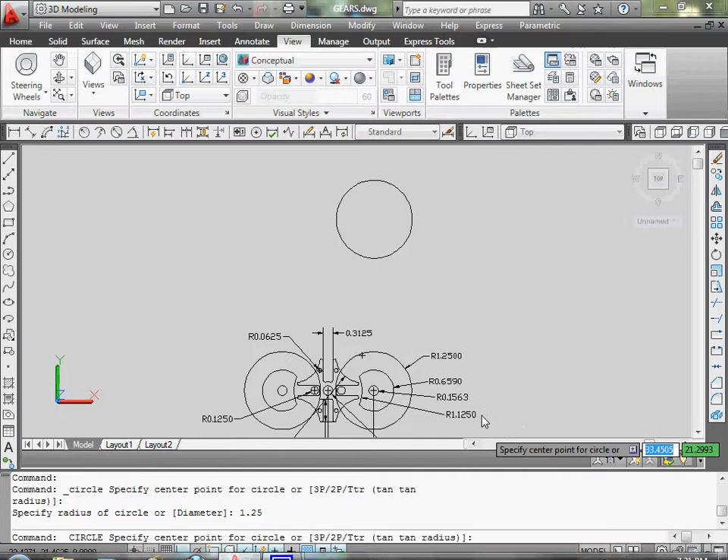So circle, my radius over here is 1.25. Then the inner circle is radius - I'm only going to do one of these circles because I can just mirror it, both are the same. So the second one is going to be 0.659. I don't know if these numbers are weird, don't worry about it, it's weird for some reason. Alright, enter 0.1563.

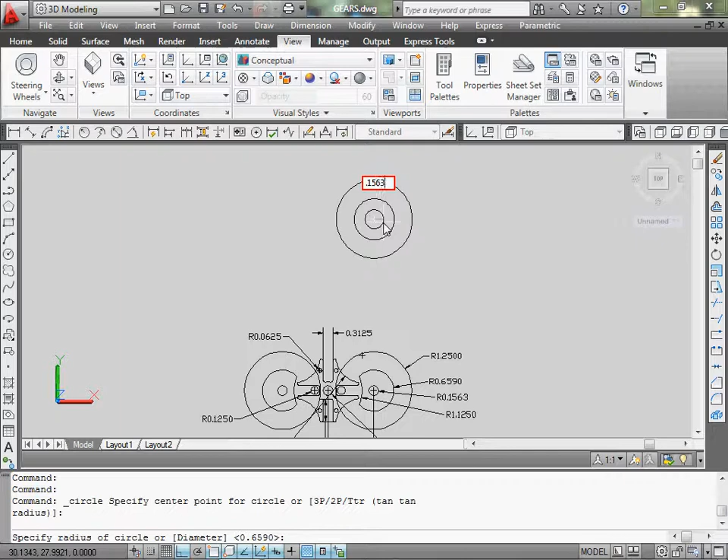Alright, so that's my first. Now I got dimensions to the center over here. So I'll draw myself a line, center line pretty much, and 1.5. Draw that circle over here, which is 0.1563. It's actually the same as this one, so I could just copy it. I'm too lazy to type it.

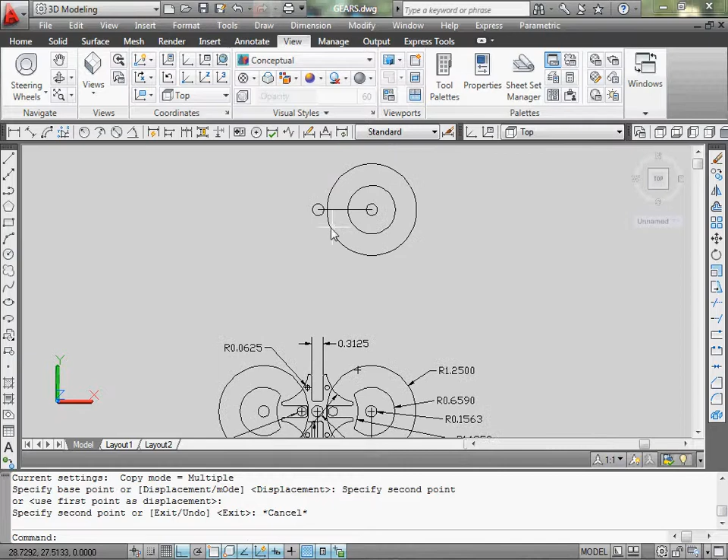And now I need to cut this from this circle here. We have a radius for that, and we know that that's the center of it. So the radius is 1.125. Do a circle, R enter 1.125. And I can use the trim command.

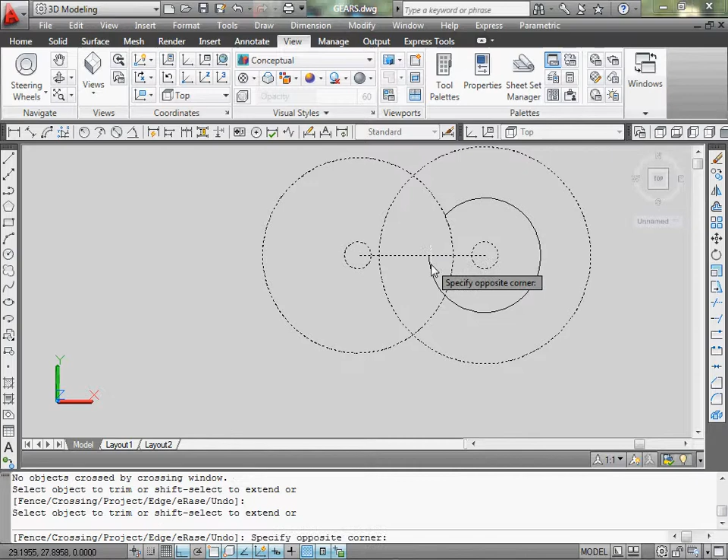Just trim this off of here, and of course I got to trim off this part too. And this I can just delete, and a center line I can delete it because I don't need it anymore. So I actually have both sides complete because I can mirror that if I wanted to. Do it for a visual right now.

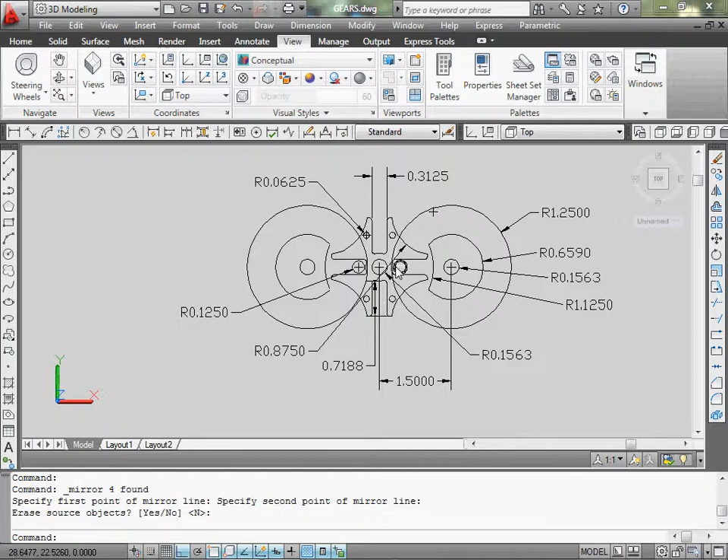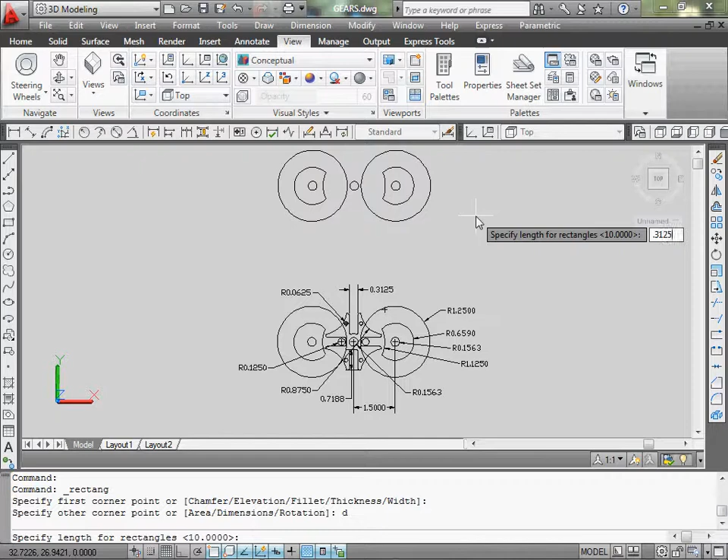And this next setup is I have to draw this whole cross-shaped item. To do that, I'll first need to get all the specs. So I can draw these rectangles because I have dimensions for that, so I'm just going to do that first. So the rectangle, D for dimensions, it's wide by 0.3125 and it's high by 0.7188.

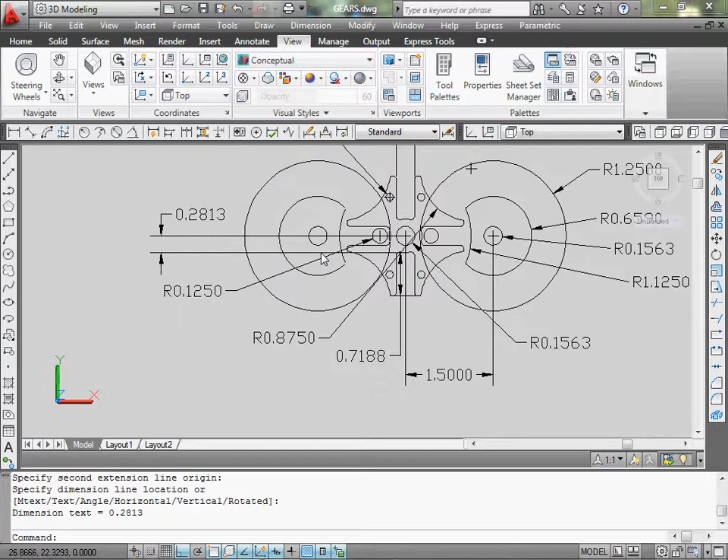Looks like I am missing a dimension. I should have a dimension from the inner circle here. There we go. So again, missing a dimension for you guys, if anybody's interested. And so it's 0.2813 from the center of the circle, or the whole item pretty much, to the edge over here. So I have a square.

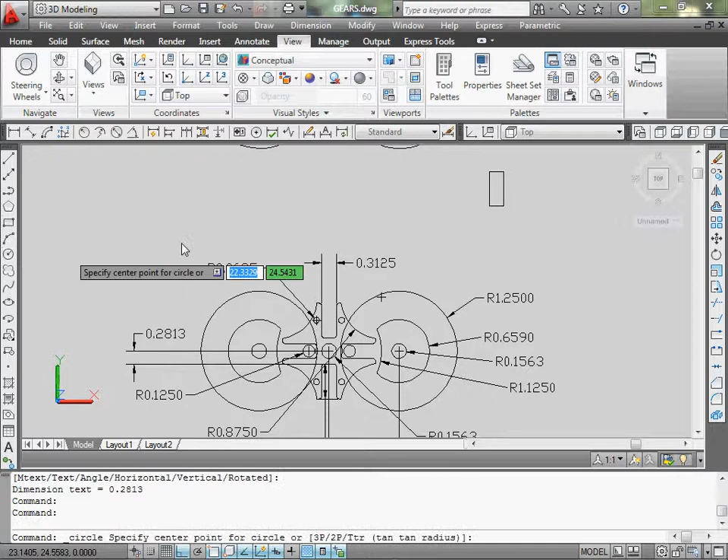So actually, technically that's the square size. If you double that, you would get actually the square. But I'm just going to do a circle, or I'm going to copy this circle we drew on over here on top. And I'm going to move it over the distance 0.2813.

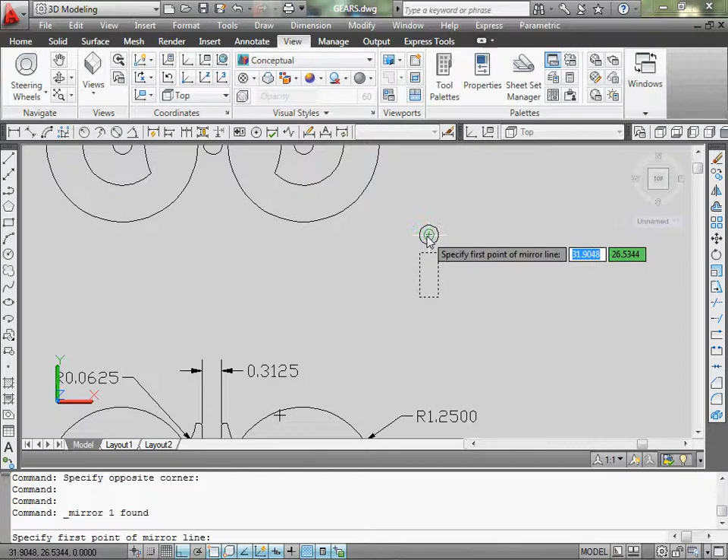So I actually have this material here in between. I can mirror this, then I can go select one of these, go to copy, rotate, pick a point, and I'm actually, before I click anything, I'm going to type in C for copy. That way I don't lose this piece. Just copy it, and I'm going to mirror it again.

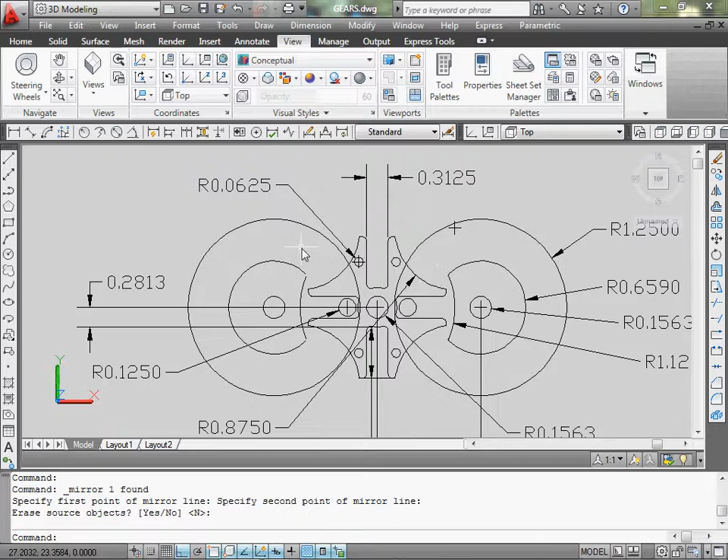Have that done, that's the radius for that little one. Let's see the outer. Jeez, I don't have the outer radius. Guess I don't. Wow, I did screw this one up. Unless I can't see it, but I think I'm missing - oh yeah, no, it's right here.

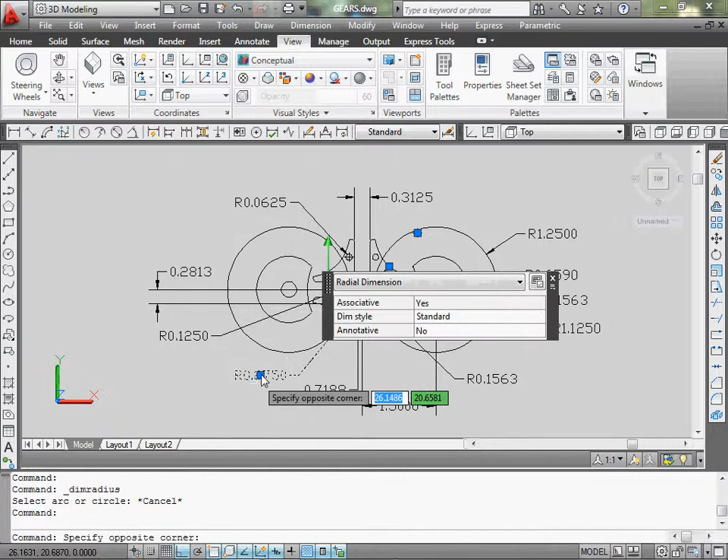I should have moved it better. Oh, that's what I'm doing. Let's see if I can read dimension. There we go, that looks a little bit better. So I do have the radius for this. The only problem is I don't know how to space it, but that's okay.

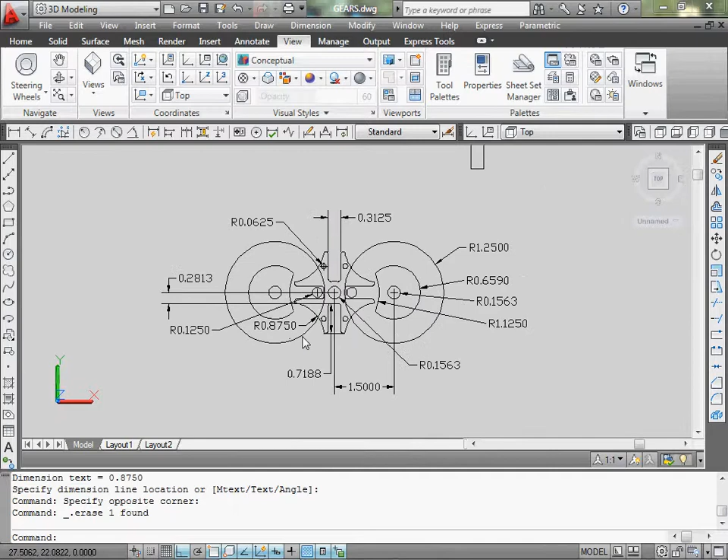I'm just going to do a circle first. R enter 0.875. That is the size of this fillet, which is a fillet. So actually, first - let's see, hold on one second.

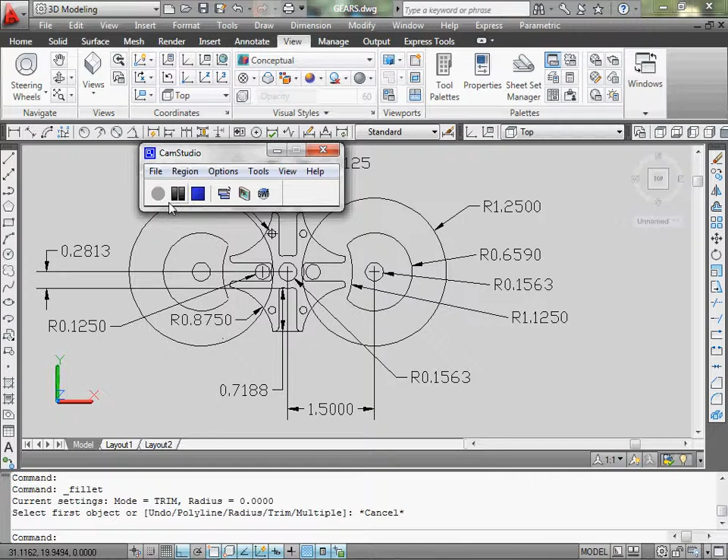So I should have just gave you guys dimension. Center of, that's the center mark of this arc right here. It's 1.125 and 1.125 away. So keep that in mind. I might have to print this out again so it'll be easier for you guys.

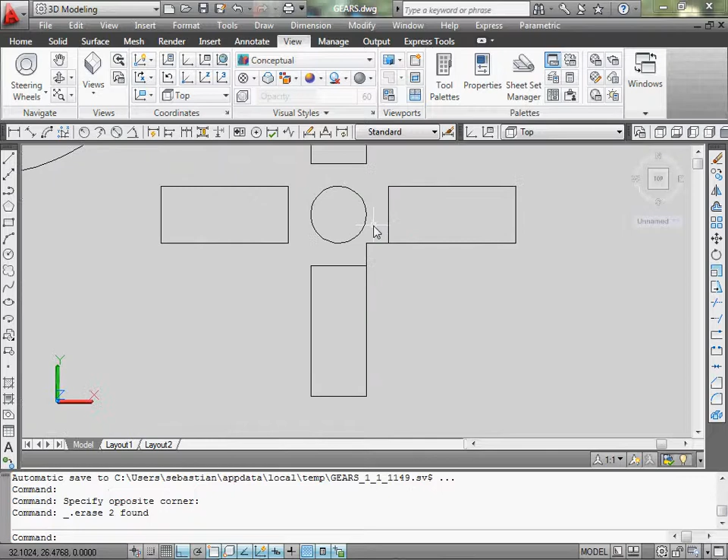So I will draw that circle, it is radius 0.875, and I can move it from the center to center of the circle here, the object. I'll move it to the right by 1.125 and move it up 1.1.

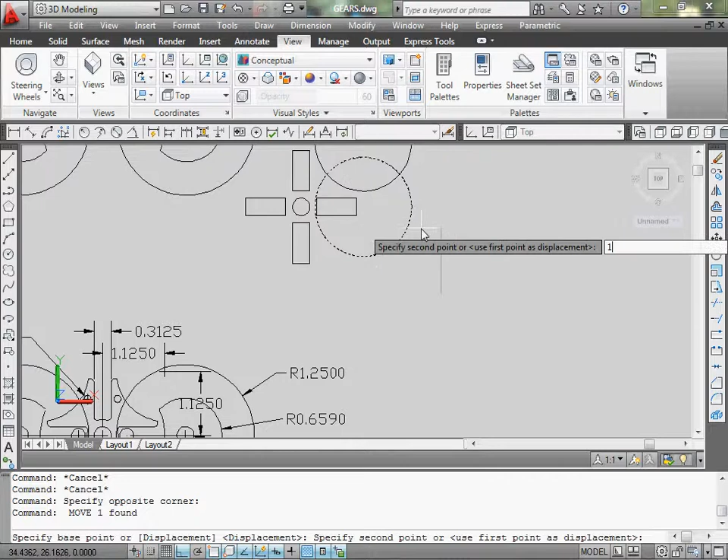Please move it up 1.125. There we go, that's the arc. Now I need to get this box here. To do that, I'm just going to draw it out using a rectangle.

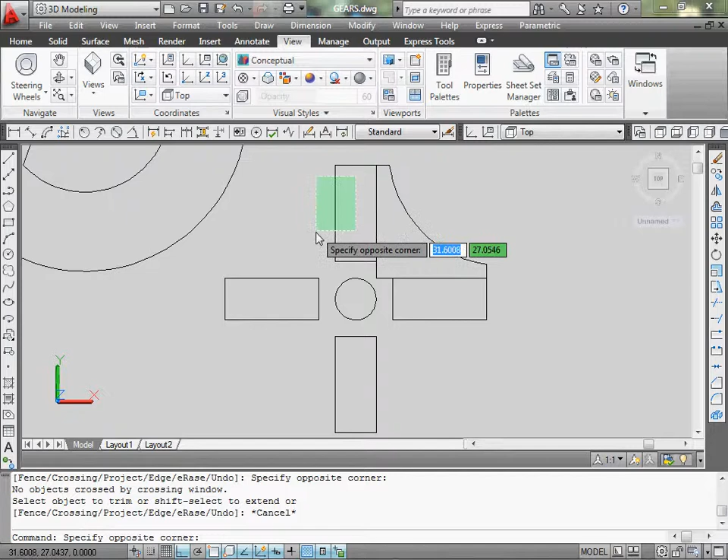Rectangle right here, make a box like that. I'm just going to trim off the parts I don't need. Size something like that. These are actually not needed anymore. Well, actually, I could leave them, but I'm just gonna delete it. Or I'll leave them because I need this line right here. So I should actually explode it.

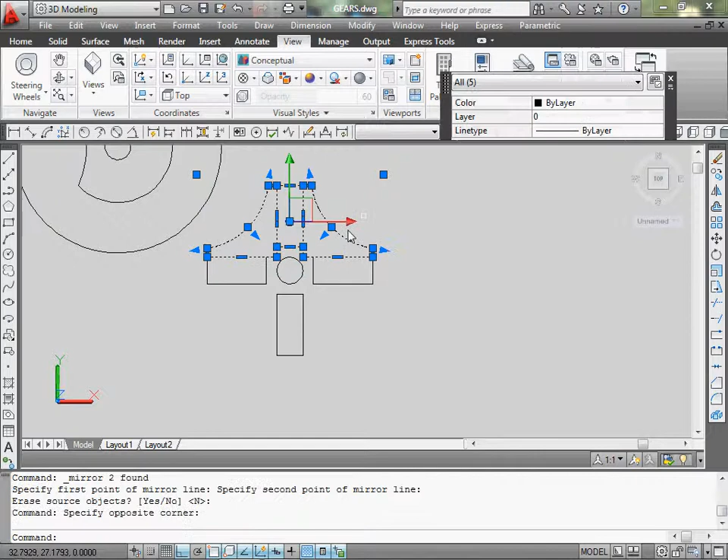But I'm just gonna mirror this around first. Mirror that, and of course, mirror it once more, going downward. Once I have that accomplished, all I need to do is explode these rectangles in here. Remove the points. Give this a fillet.

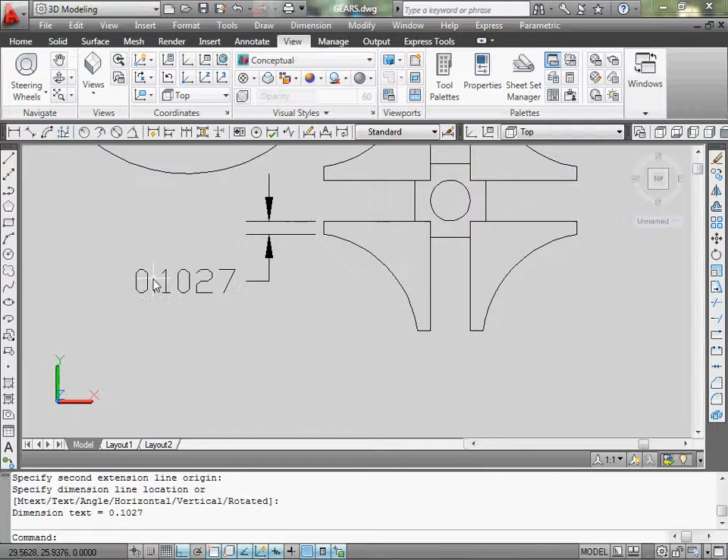I can dimension this. I'm not going to give you guys a specified fillet size. 0.1, I'm just going to do a little bit smaller than that, so it looks like this. So I will do 0.05. See, I was going to tell you guys to figure that out on your own, but I just told you.

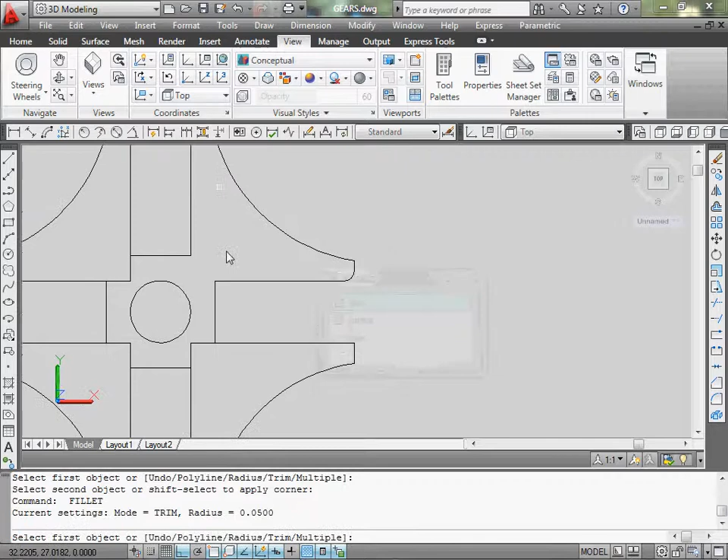But again, make sure you do all of them. Got a glitch on that side. Jeez, what the hell's going on? Gotta explode this before I go any further because it's causing problems. So I'm gonna select this again. Explode it all, each one is separate now.

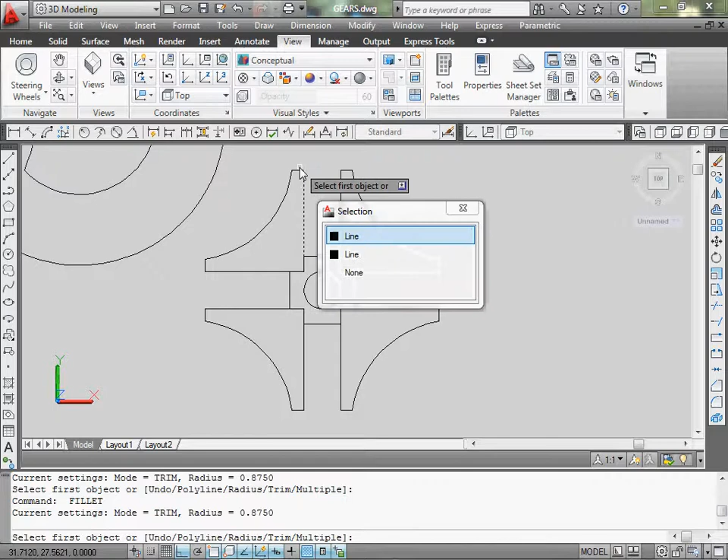Got a fillet, I got the radius set. Radius, no it's not set. The old one, 0.05, I do one. Should I select one? Line, of course. And should be able to. No, alright, you have to do each one.

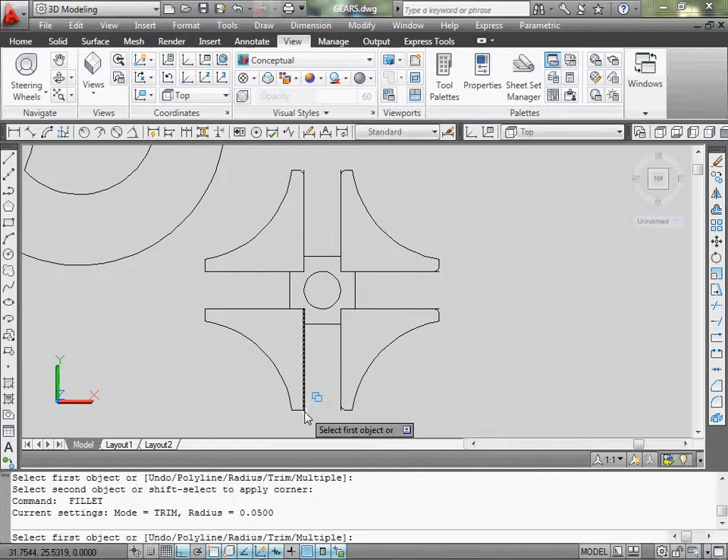What was the radius of the large circle? That makes sense for me. It's 0.875, it should be on there. It's just hard to find it because I put it to the other side.

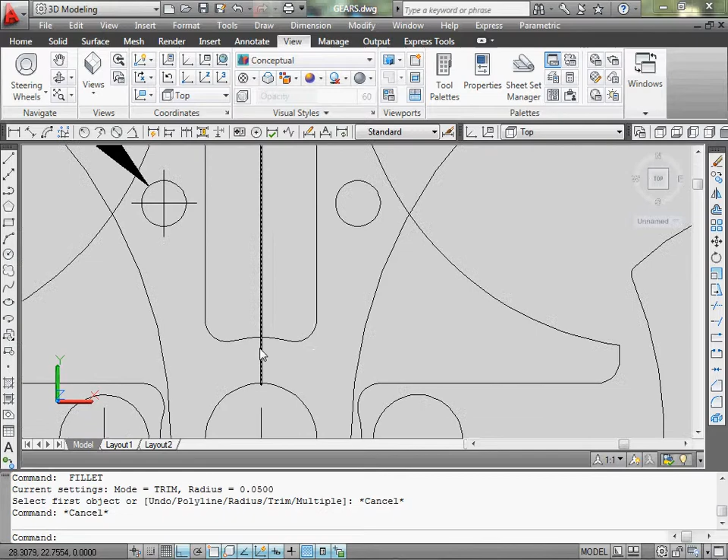Once you have all the corners filleted like that, you still need to fillet the inside, like so. These are filleted, so I'll do that too. It's asking me this two-line system because I actually double-lined this whole system for some reason.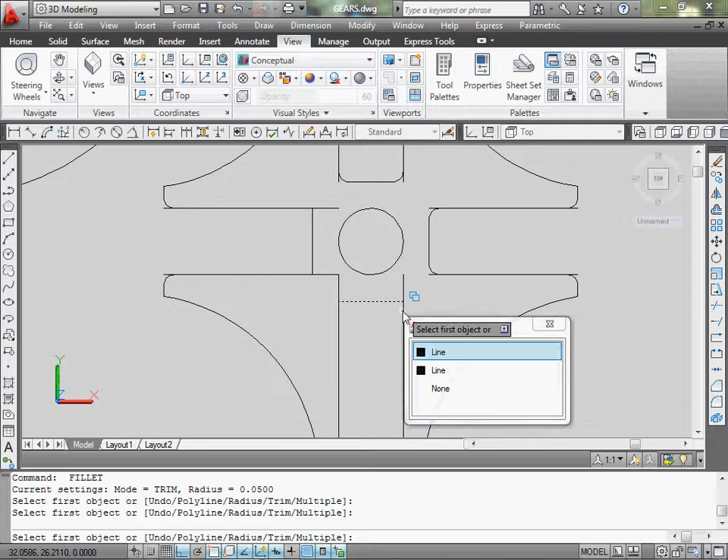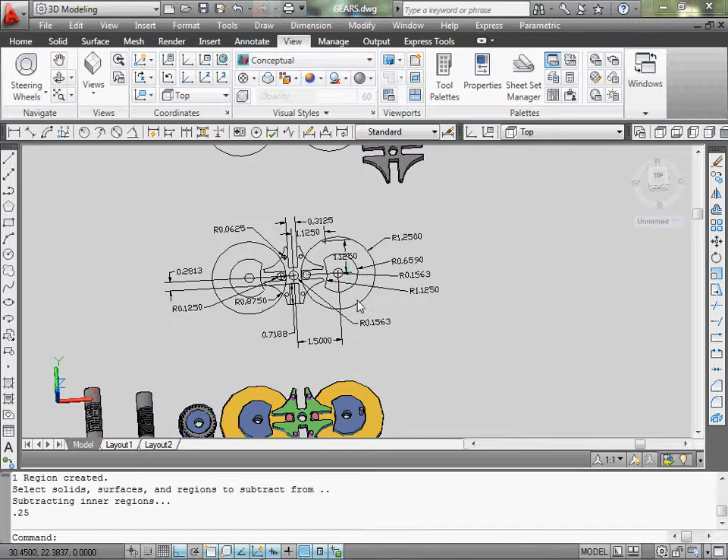There we go. And to make it short and sweet, I can just press pull this part. Specify distance, I think it's a quarter. You guys can do it. I'm missing some measurements that I have to look at.

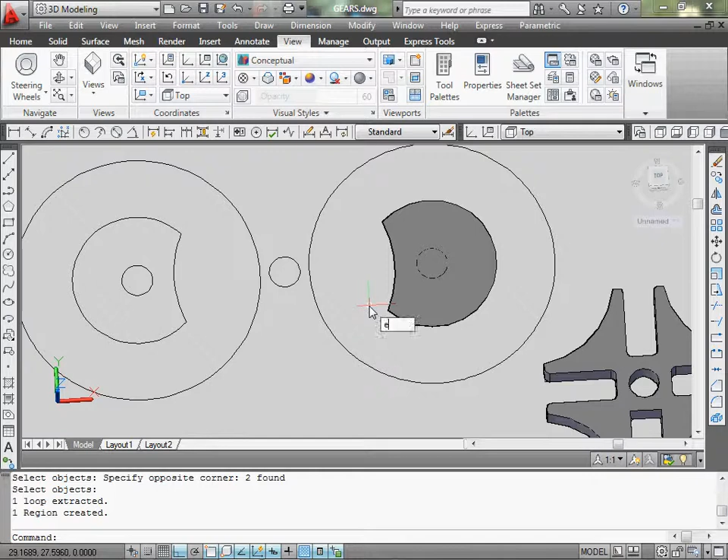Sure. Anyways, so I did press pull that. I can extrude these so that each one's separate. Or first I gotta make them regions. There we go, it's a solid piece now. Extrude it, I'll extrude a quarter. Extrude the insides to 2.5. And I'm gonna do this one going downwards, a quarter.

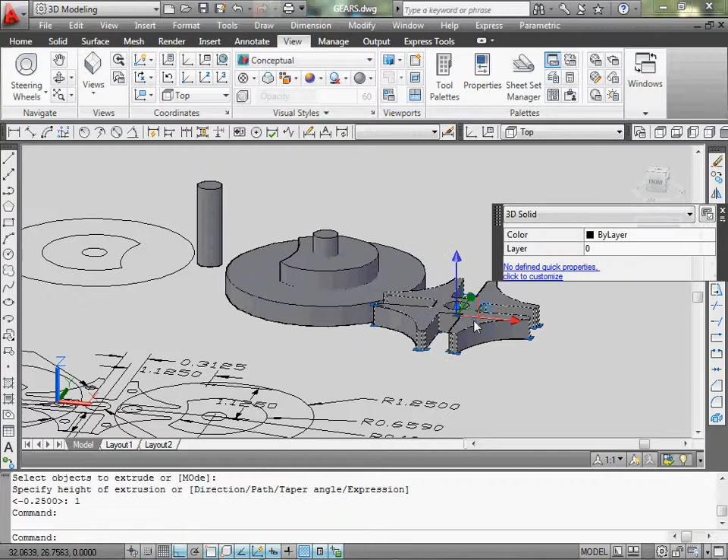So I actually have a piece like that. This will actually fit perfectly here. If I do extrude, being 1 inch, move it over.

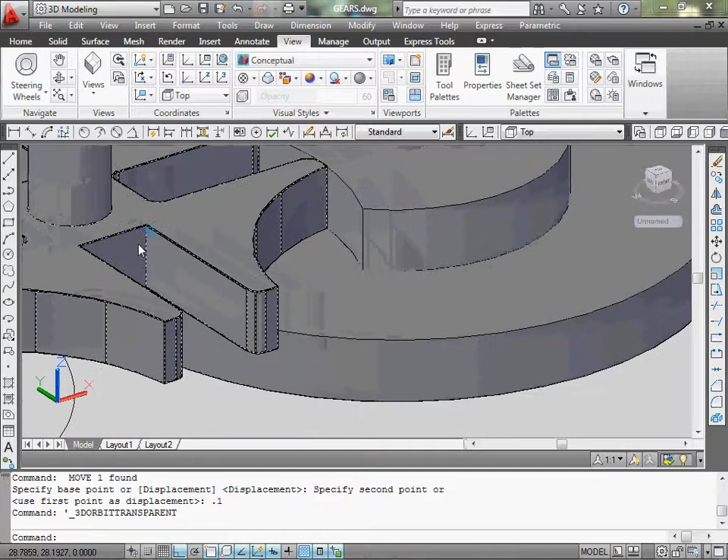Since I know that thickness is 0.25, I shouldn't actually make it exactly the same. I will actually make it a little bit higher, that way there's a clearance. And actually what I could also do is fillet. I missed this edge, but I did all the other edges. I fillet the top and bottom also to make this item stronger to handle it, if it's printed on a 3D printer. So I didn't do that, but you guys can do that.

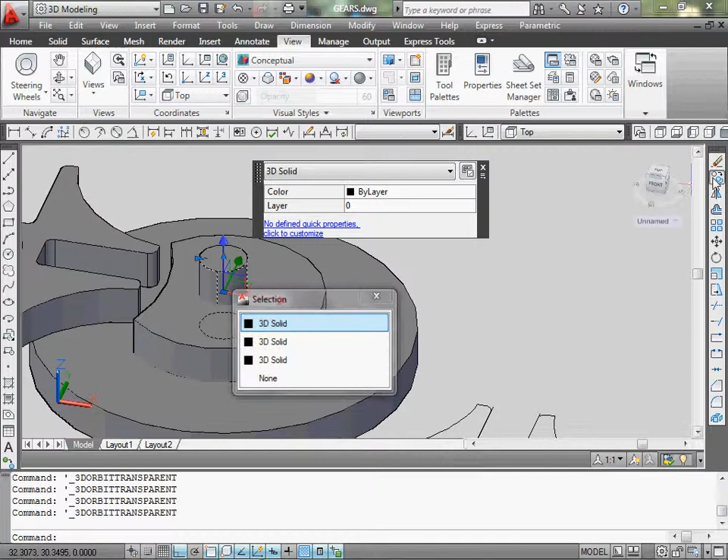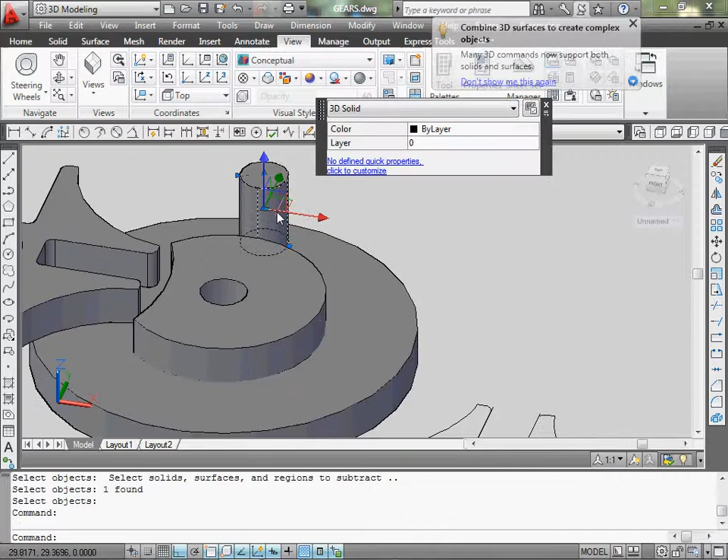And if I want to subtract this from this whole system, I just make a copy of it over. So it's 1 inch, and I'll use subtract. Select this item, subtract that, select that, subtract that. There we go. And move this back 1 inch. So there's actually a hole in that one.

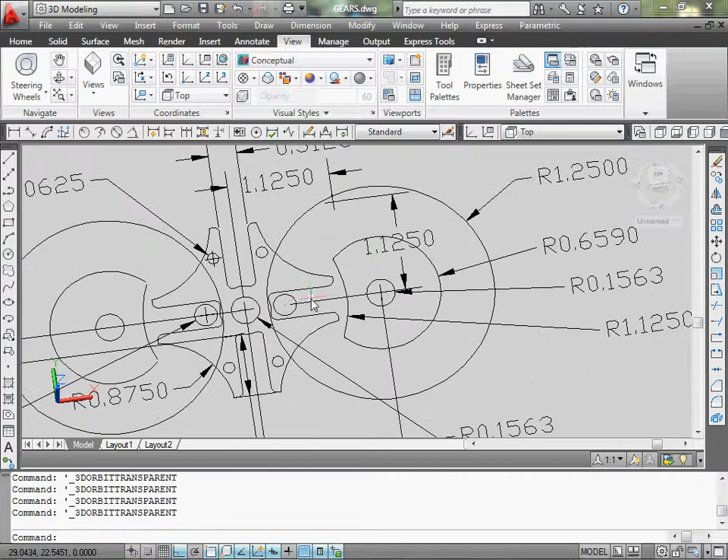I can union these together or not. The pins are easy, they're not actually required and I don't have a specified location, so that's okay. But this one is important, this is part of this system. And of course I'm missing a dimension for it, its location. So I'll give that to you guys.

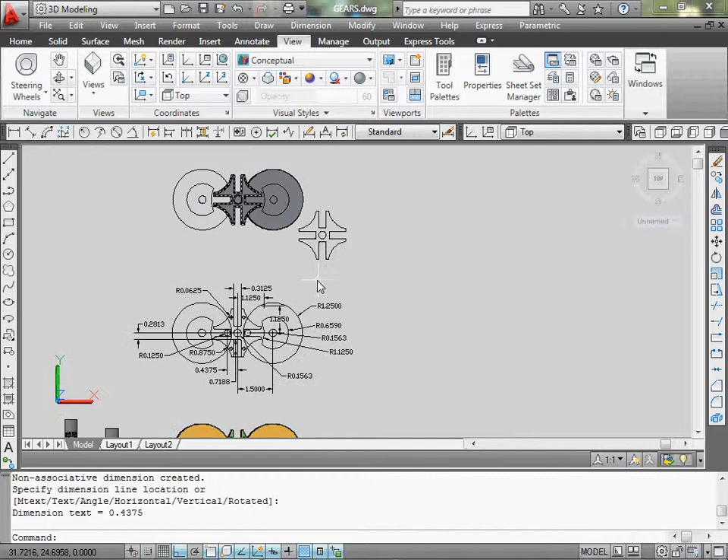If we go top view... to that. And the size, there is a dimension for that, so it can be easily established. I can draw that out again. R enter 0.125, that's the radius of the cylinder. Move it to actually the middle.

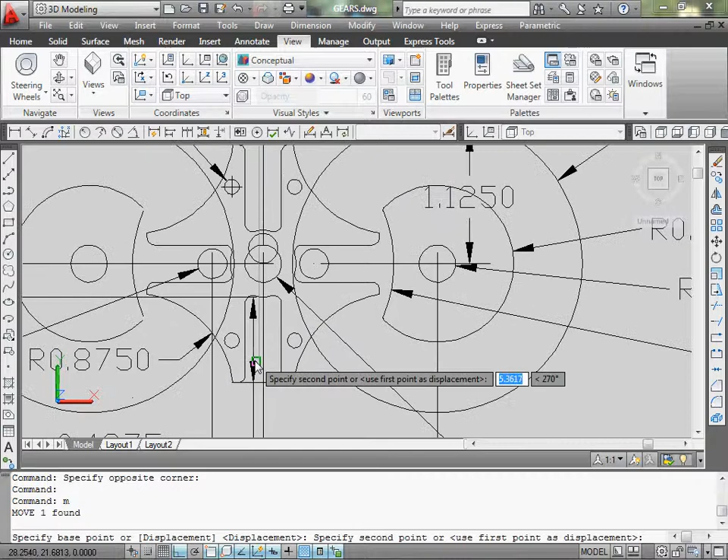Oh, maybe I should put it in the middle. And move it over 0.4375, 0.4375. So that's actually a 2D drawing right there.

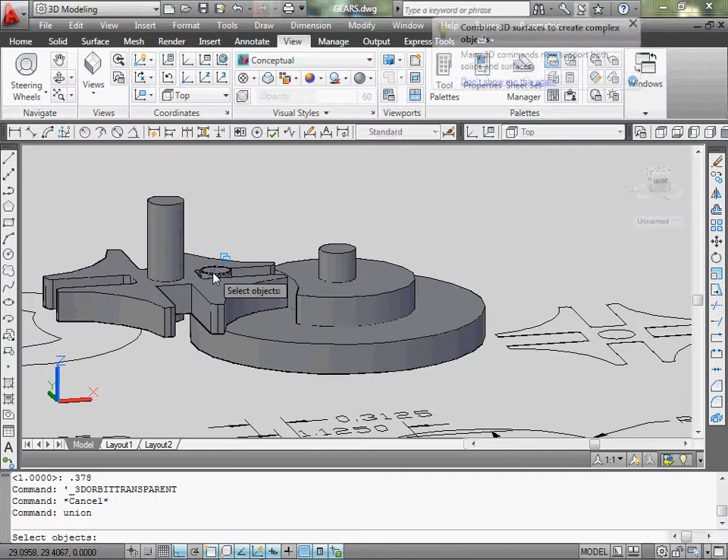Extrude that out, do a quarter or more. Do 0.378 because I raised this part and it won't affect anything else. I can union this little pin with this body right here, and now it's one piece.

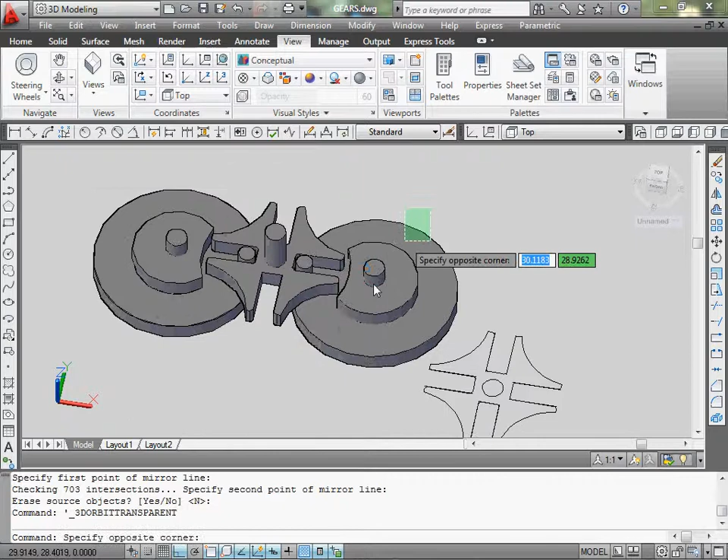Mirror it over using the center, and I think I should do that to these two. Mirror, center, and I actually have 2 pieces. I actually could make 4 if I really wanted to, so I can do that. Rotate, select the middle, and I type in C for copy.

I guess it won't work because it's overlapping, unless... uh-oh, my computer froze. Better pause this.